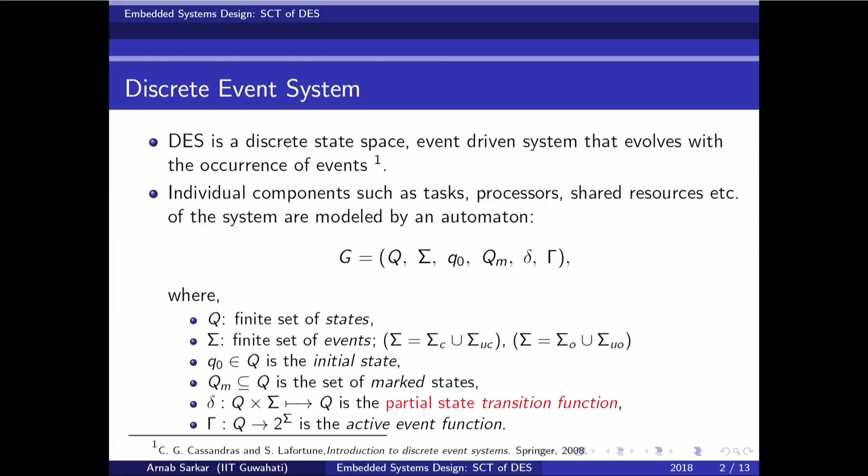We will take an example, but this is what it is. So, therefore, del will be defined only for the active event set at a given state. So, a given state has an active event set which is a subset of the events in sigma, and on those events the del function or the transition function will be defined.

Now, we will first take an example of an embedded system, and we will also understand what we want to design. I will take the example of the very popular dining philosophers problem. And then we will show how individual models can be developed for this embedded system, and then how automated synthesis of the embedded controller can be designed for it. So, now let us first describe the system.

The embedded system that we intend has two processes, and these two processes or functions we name philosopher 1 and philosopher 2. These two philosophers are two processes or functionalities in the embedded system that we want to design. Two philosophers are seated on either side of a table. So, this is how it is defined.

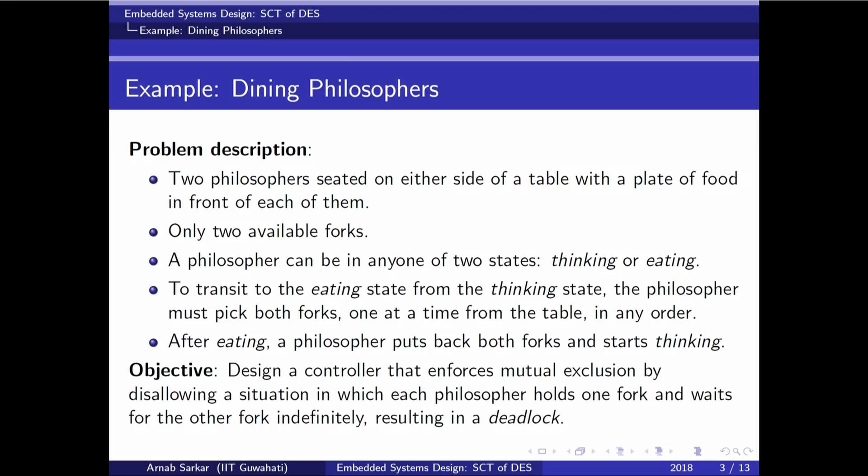Now, we said that a philosopher will pick the forks one at a time. So, a situation can happen that, let us say, philosopher 1 has picked one fork for eating, and at the same time philosopher 2 also wanted to eat, and therefore it picked the other fork. Then both the processes, both the philosophers, are waiting for the other fork, and nobody can start eating because the other resource is taken by the other philosopher. So, the objective of the embedded controller is to enforce mutual exclusion by disallowing a situation in which each process takes one resource and waits for the other resource indefinitely, leading to a deadlock.

With this definition, let us go about the modeling. Firstly, we define the events. The event of picking a fork by a philosopher is controllable. So, the supervisor can control whether a philosopher can pick a fork, can take a resource at a given time or not. So, it will allow or disallow a process to pick a resource, while the event of returning forks is uncontrollable. So, after eating, the supervisor cannot control it from relinquishing the resource, right.

So, what is the description of events? We now symbolically describe the different events and name them symbolically. So, the first event is F11. F11 means philosopher 1 picks up fork 1.

F12 means philosopher 1 picks up fork 2. F21 means philosopher 2 picks up fork 1. F22 means philosopher 2 picks up fork 2. RF1 means philosopher 1 puts both forks down, relinquishing the forks. So, RF1 means philosopher 1 puts both forks down, and RF2 means philosopher 2 puts both forks down.

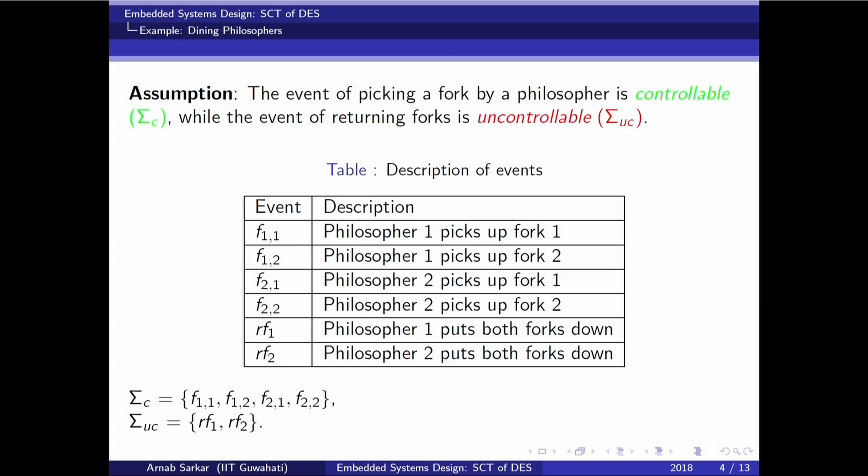Now, before the design begins, we first model each of the components in the embedded system using the discrete event system model. So, first philosopher 1. Firstly, the initial state is T1, that is philosopher 1 is in the thinking state. After some time, let us say philosopher 1 wants to eat, and he picks fork 1. So, the event is F11, philosopher 1 picks fork 1. When he does this, it goes to the intermediate state I11. In this state, philosopher 1 has picked up fork 1.

And then after this intermediate state, philosopher 1 will then pick the other fork. So, at I11 he can pick fork 2, which is F12. After this he has picked both forks and he goes to the eating state E1. After eating, he releases both forks using RF1 and goes back to thinking state T1.

Similarly, at the thinking state he could have first picked fork 2, F12. So, from T1 on event F12 it would go to state I12, which is another intermediate state in which philosopher 1 has picked fork 2 and has not picked fork 1. After he picks up fork 1 at I12, he goes again to the eating state E1. So, philosopher 1 now again has both forks and he is eating. After eating is complete, he relinquishes both the forks and goes back to the thinking state. This is the behavior of philosopher 1.

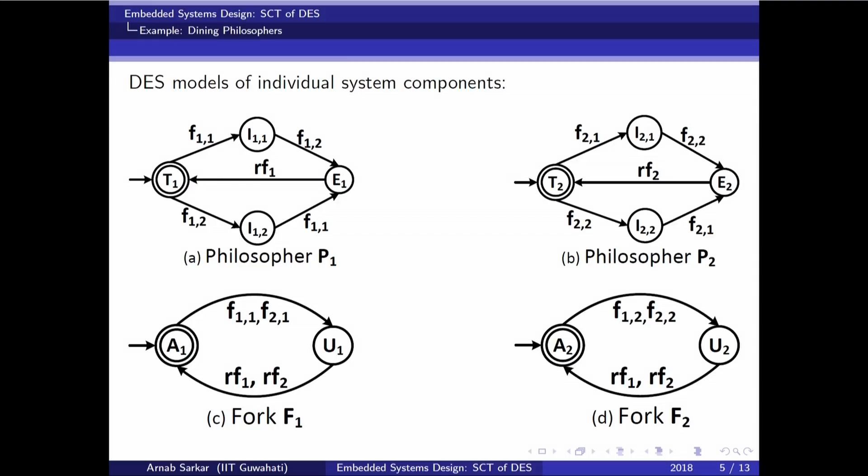Now, how do we model the concurrent behavior of different components in the embedded system? Before we go about the design of the controller, we have to define the concurrent co-execution behavior of the different components of the embedded system in order to obtain the overall behavior of the embedded system. First, we are modeling. So, what are we modeling? The behavior of the embedded system.

We are going bottom up. First, we have modeled the individual components: philosopher 1, philosopher 2, resource 1, resource 2. Now, slowly we have to obtain the uncontrolled concurrent co-execution behavior of the entire embedded system, on which control needs to be imposed.

So, how do we get the concurrent behavior of such an embedded system modeled component wise using DES? Through parallel composition of the DES. So, let us consider two DESs. The first DES G1 is (Q1, Σ1, δ1, Γ1, Q01, Qm1), and similarly I have G2, which is (Q2, Σ2, δ2, Γ2, Q02, Qm2).

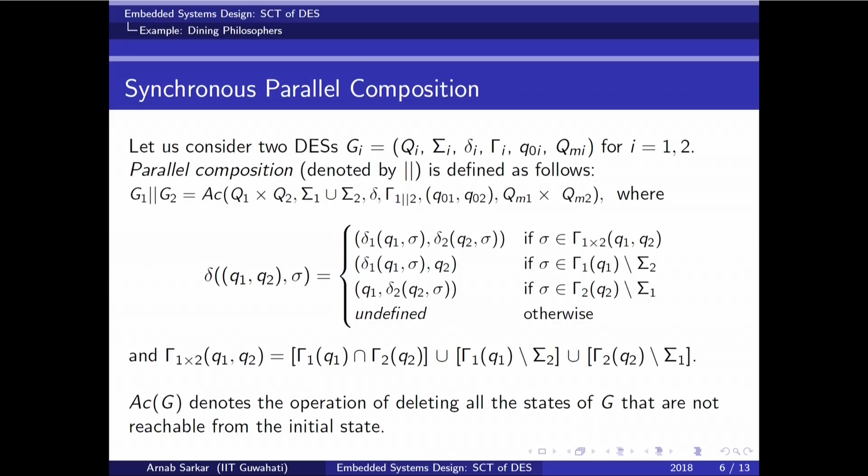Hence, when defining the transition, F1 and F2 must synchronize on RF1 and RF2, because they are defined as part of both automata. I cannot take the second and third line of the RHS of the transition function defined in the earlier slide. Only the top line will be applicable, where del 1 and del 2 both are applied, if sigma belongs to gamma 1 cross 2 of q1 comma q2. Okay. So, F1 and F2 must synchronize on RF1 and RF2.

And what are the events that are defined in F1 but not in F2? F11 and F21. And what are the events that are defined in F2 and not in F1? F12 and F22.

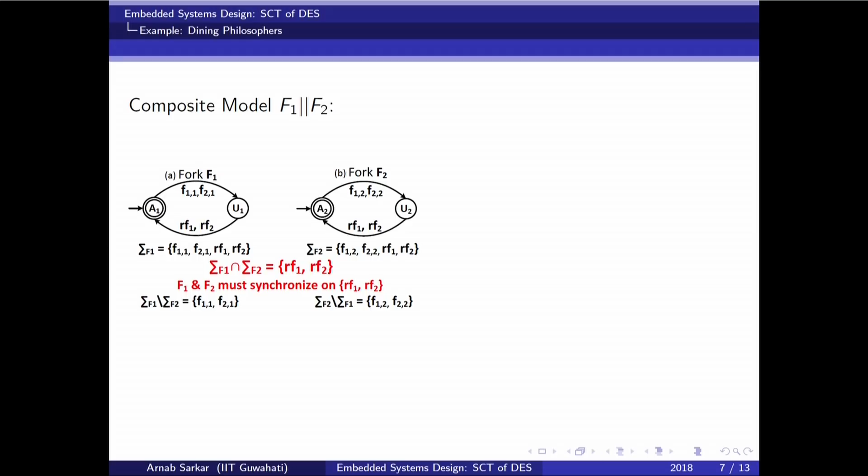So, the event of picking up fork 1 by philosopher 1 or philosopher 2 is defined in the resource model of fork 1, but not in fork 2. Similarly, the events of picking up fork 2 by philosopher 1 or philosopher 2 are defined in the resource model of F2 and are not part of F1.

Now, the number of states in the composite model will be given by QF1 cross QF2 and is equal to 4, because fork 1 has 2 states and fork 2 has 2 states. So, the total number of states in the composite model will be QF1 cross QF2 equals 4. And what are the states? The initial state will be Q01 comma Q02, which is A1 comma A2. A1 is the initial state in F1 and A2 is the initial state in F2.

So, initially the composite automata is in state A1 A2, and because it is also the marked state, it has 2 circles. Marked states, I forgot to tell previously, are represented in the automata by these double rounded circles. So, why are these double rounded circles there? It says that it is initially in available state, then it is in use state, and then finally it will go back to the available state when any process relinquishes fork 1.

In F1, it goes from A1 to use state and then, after it is relinquished, it goes back to A1, and that is its idle or initial state and also its final or marked state. So, therefore, in the composite automata A1 A2 is the initial state and also the marked state. At A1 A2, either philosopher 1 or philosopher 2 will first pick up, let us say, fork 1. So, let us say the event that fork 1 is picked up.

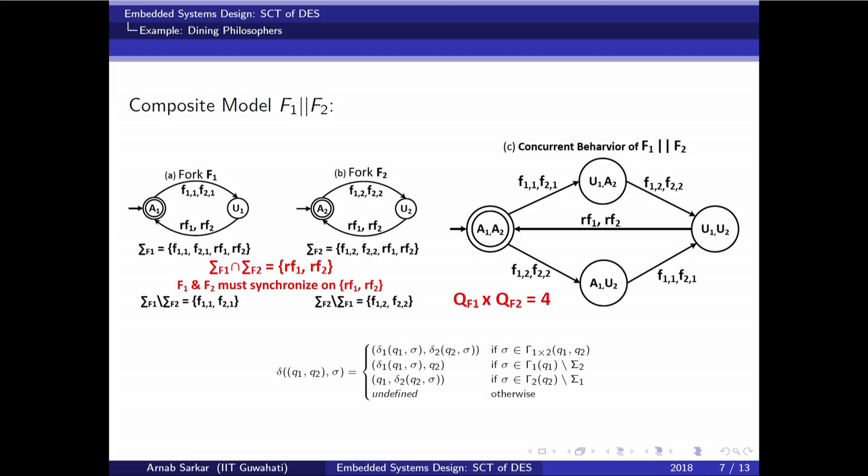So, either philosopher 1 relinquishes both the forks or philosopher 2 relinquishes both the forks, and then both the forks go from U state back to A1 A2, which is the initial and marked state. So, this represents the concurrent behavior of the resources.

Similarly, I can obtain the concurrent behavior of the philosophers, of the two concurrent philosopher functions in my embedded system. Now, what do I want to obtain? The concurrent behavior of the two processes, of the two individual functions in the embedded system. This is what I want to obtain. So, these two philosophers we have already modeled and seen how they are modeled.

And in this one, the point to note is that sigma P1, that means the total set of events that are possible in P1, are F11, F12 and RF1. So, F11, that is philosopher 1 picks up fork 1, F12, that is philosopher 1 picks up fork 2, and RF1, that is philosopher 1 relinquishes both the forks. These events are defined in P1.

What are the events that are defined in P2? F21, F22 and RF2, that is philosopher 2 picks up fork 1 or philosopher 2 picks up fork 2 or philosopher 2 relinquishes both the forks. And there are no common events, so they do not need to synchronize on any events. Why? Because sigma P2 intersection sigma P1 is phi.

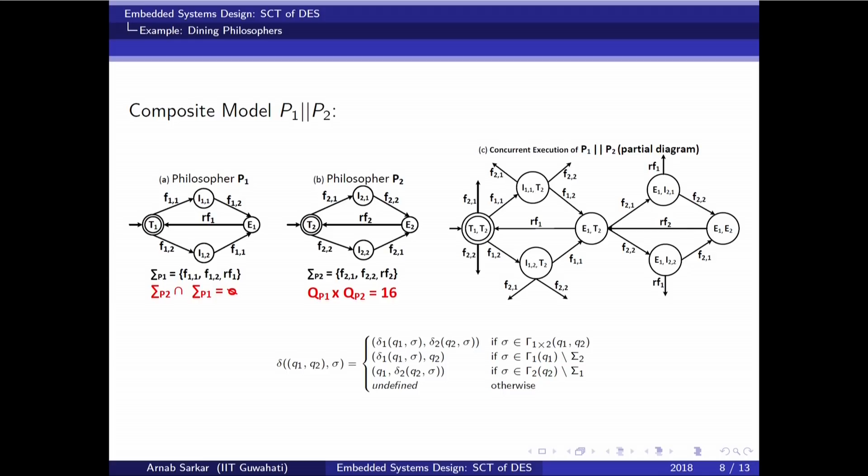Now, when the resources and the processes work together, their composition gives the composite system model. The system model consists of the processes that will be executing and also the resources which will be consumed by the processes. The behavior of the resources when composed with the behavior of the processes gives the composite system model PF, and that is given by P1 parallel P2 parallel F1 parallel F2.

And here we see that sigma of P1 parallel P2 has all the 6 events that we have defined, and F1 parallel F2 has all the 6 events that we have defined. Therefore, the composite automata must synchronize on all events. So, only the first line of the transition function.

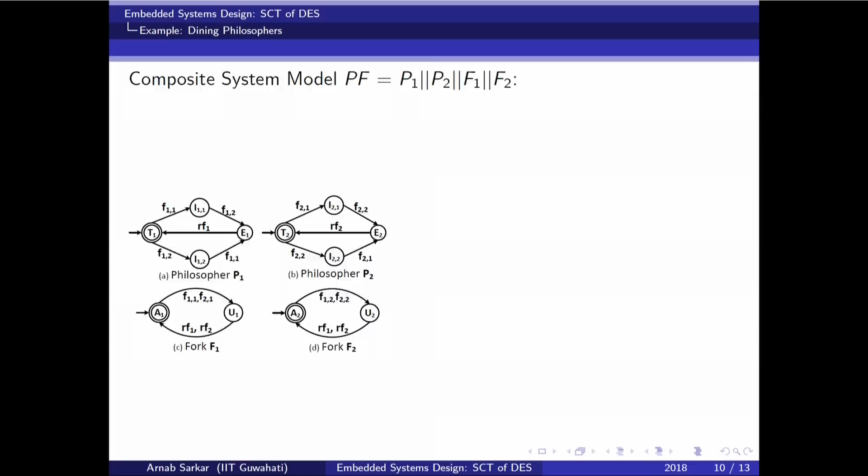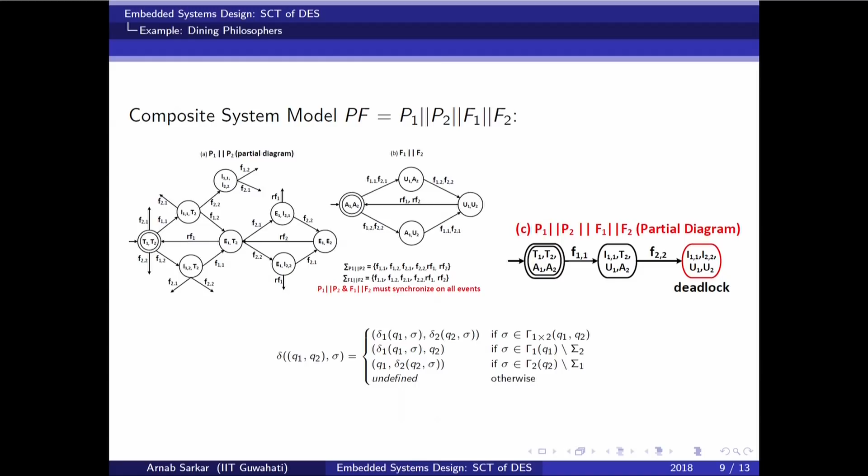The very partial automata that we showed in the previous slide, here on the right side, C part on the right side, this path or these two transitions can be seen here. So, if you see the right composite automata, from T1, T2, A1, A2 on F11 I go to I11, T2, U1, A2, and then I take F22 to come to the deadlock state. So, this path is present in here.

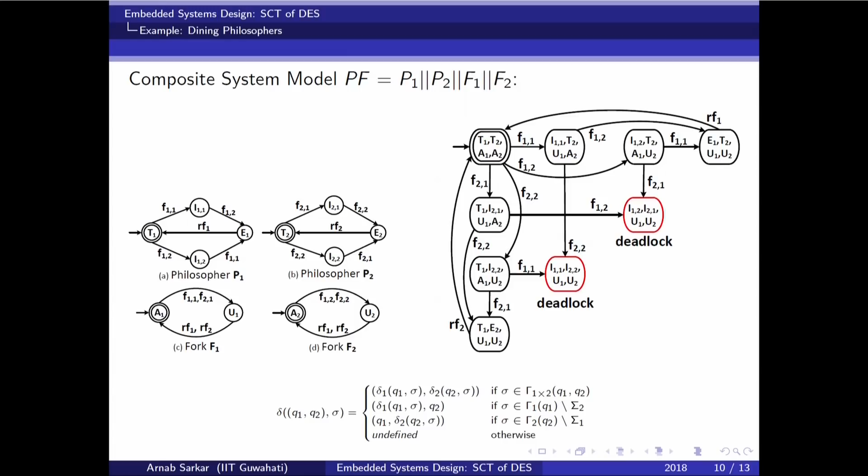So, this model on the right represents the composite behavior using all the resources and processes that I have in the embedded system. Now, given this, I have to be able to control this automata. I have to control this concurrent unrestricted behavior. So, how do I control this concurrent unrestricted behavior? By designing a specification that we want. So, what do we want?

We want that if fork 1 is picked up by philosopher 1, only he should be allowed to pick fork 2, or if fork 2 is picked up by philosopher 1, only he should be allowed to pick fork 1. The other way, for philosopher 2, if philosopher 2 picks one of the forks, only he should be allowed to pick the other fork. And this is enforced by this specification automata here, which we need to define or model.

So, in the legal specification that we want, initially I am in state I0. At state I0, if I take the transition on the top, what happens? Either fork 1 or fork 2 is picked up by philosopher 1, and I go to intermediate state I1. So, intermediate state I1 tells me that philosopher 1 has picked up either fork 1 or fork 2.

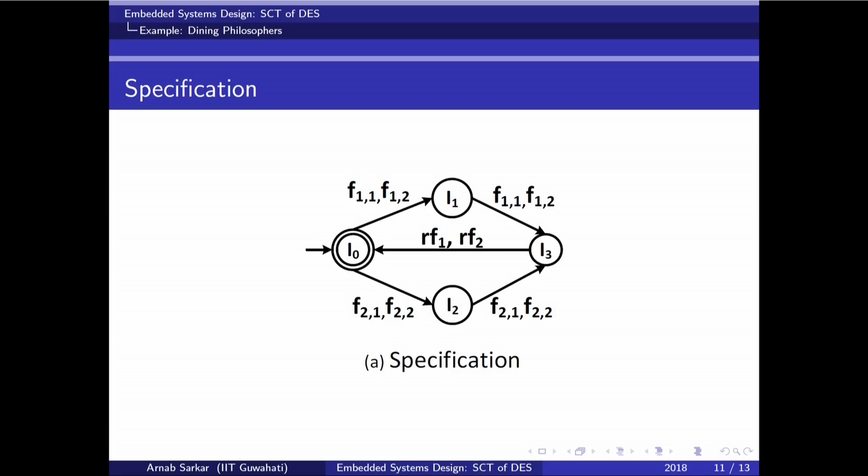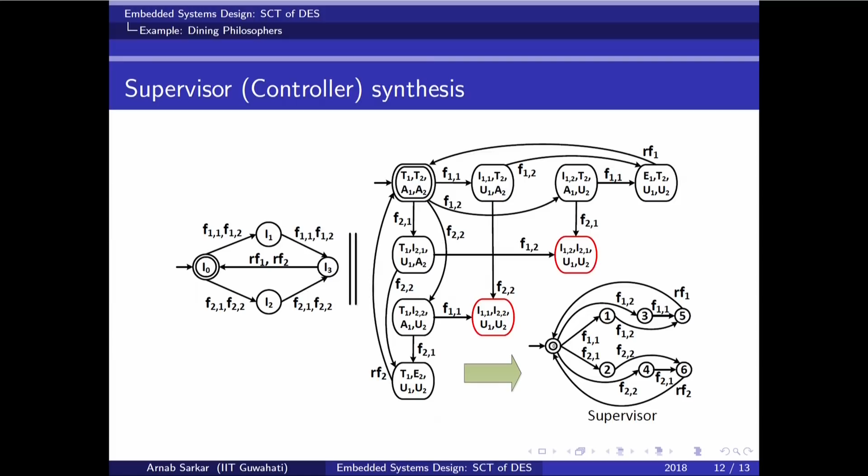Therefore, when I parallel compose the specification with the uncontrolled behavior, I get the supervisor which disallows transition to the deadlock states of the composite behavior. Okay. So, the controller will only allow those events which do not lead to deadlock states. The controller or the supervisor is such that it allows only those events which disallow transition to the deadlock states.

Now, after this, finally, how does the entire system function? I have the unrestricted system, which is the system behavior, the physical system. Now, let us go back and think of the cyber physical system or the control system that we had defined in lecture 1. We had a physical system, which is the system in green shown here. We had a controller which controls the physical system, which is shown in yellow over here, that is the supervisor.

I sense what is the current state of the physical system through a sensor, that is fed to the controller, and the controller generates appropriate actuation actions. Now, suppose at the initial state of the system, F11 is taken. So, the sensor tells me that I am in state 1 and the event F11 has occurred. So, the sensor sends the supervisor the input that I am in state 1 and event F11 has occurred.

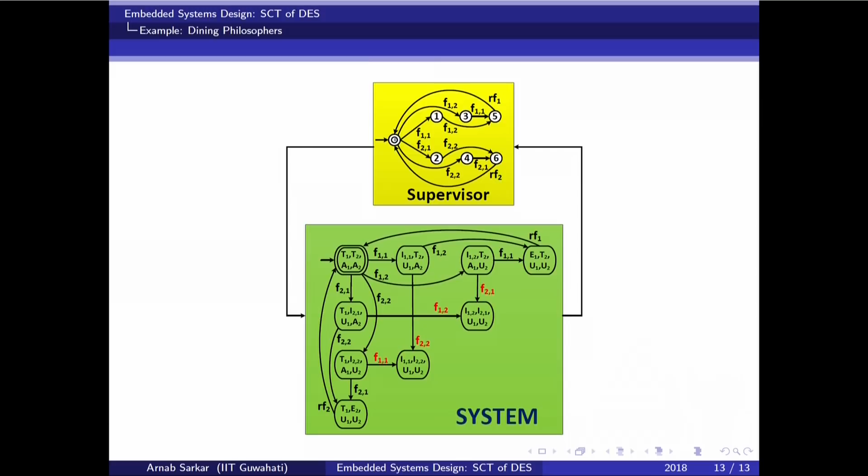This goes to the supervisor, and the supervisor then says what you are allowed to do. The supervisor accordingly goes from the initial state on F11 to 1, and then says that you are only allowed to take F12 and you are not allowed to take F22. So, it tells the actuator to tell the physical system to only allow F12 and not allow F22, because F22 will lead to a deadlock state, and thereby we have obtained the controller which controls the physical system.

So, in this lecture what have we studied? We have studied how to formally model the behavior of the entire system, and we studied how to obtain a controller. Now, there are automated tools such as Supremica and TTCT where you can define these individual models, and the tools will automatically apply these transition functions, compose them, and we will have a correct by construction supervisor or controller.

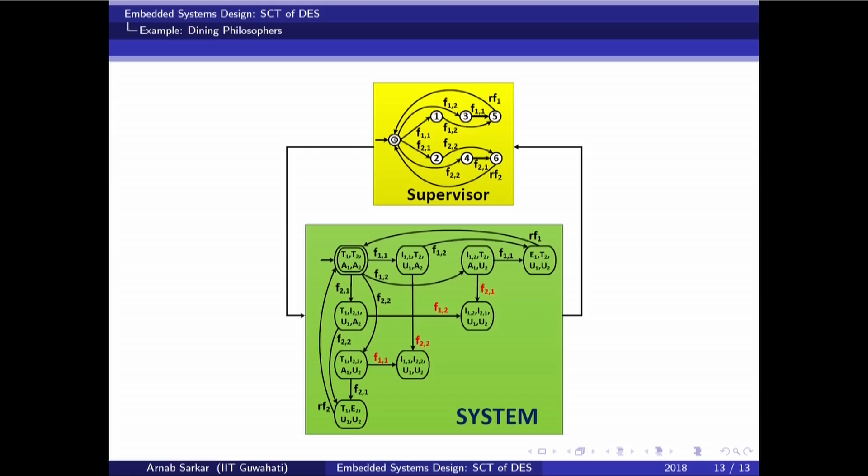So, if the behavior of the system has been modeled correctly, and if the specification has been modeled correctly, then we have a correct by construction procedure by which we will obtain a supervisor or controller for the system that can be applied on the physical system to control it appropriately. With this, we come to the end of this lecture.